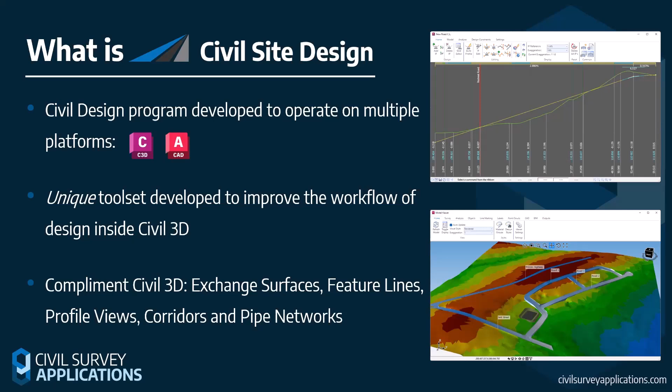However, we're not intended to be a replacement. As I said, we're intended to be like a companion. So the idea is that with all of your design and all of the extra tools and functions that we offer that Civil 3D doesn't, you're then able to generate Civil 3D profiles, profile views. You're able to generate a corridor, a Civil 3D corridor from your string design, which in turn will also create the assemblies and sub-assemblies for you, including pipe networks.

So you can use Civil Site Design for your pipe network design, your analysis, and then output profile views of your pipe networks, and also your structures and pipes and structures in the drawing. So this is just a very broad brush kind of picture of the type of things that we can do with the software, but this is how it integrates with Civil 3D.

Some of these things you'll see, but due to the time frame we've got, this is very much a greatest hits or taster session of some of what we can do to improve your Civil 3D workflow. Now, when it comes to key features, I've got quite a few here to go through, some quick, some not so quick, because they require a little bit more attention.

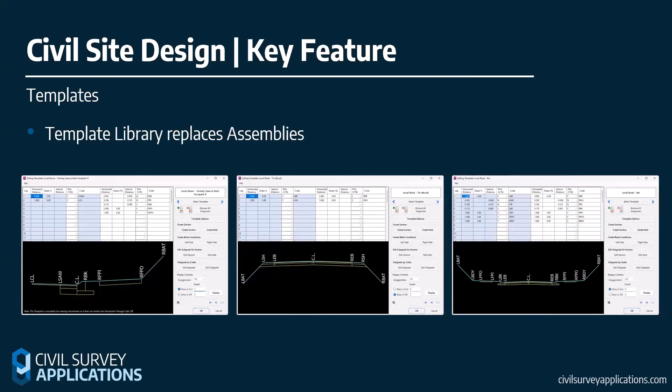And by the way, if you are a Civil Site Design user, you are going to be getting a sneak preview of 25.1, which is due out probably in the next week or two. And some of the new features which have gone into that, including a brand new sectional volumes tool, you'll actually get to see, which is kind of a bonus.

Artificial intelligence is also part of Civil Site Design. You're actually going to see me use this first one - this is called Project Assist. This was a module that was developed a couple of years ago, just to sort of dip our toe into the use of AI with civil design software. You'll get to see this in action, so I'm not going to spend too much time talking about it here because it's pretty meaningless without a demonstration.

But also developed on V25, we've now got the option to use custom ChatGPTs to develop what we call scripts for advanced cross-section editing. For those of you that know what Civil Site Design is, we have something called design variations, and in V25 we added what we call custom variations. So customers can develop their own variations, and you can actually use a custom ChatGPT to help you develop them. So AI is now becoming a significant part, and my understanding is it will also become a significant part of the software.

Now, one of the big components of our software is the vertical grading editor. We undertook a user feedback survey a couple of years ago now, and one of the main responses we got back as to what was the top feature was this feature, the vertical grading editor. So our customers tell us that this feature is one of the key features. The good thing about this is that we can basically apply speed table assessments - Austroads speed tables can be applied in the background with this.

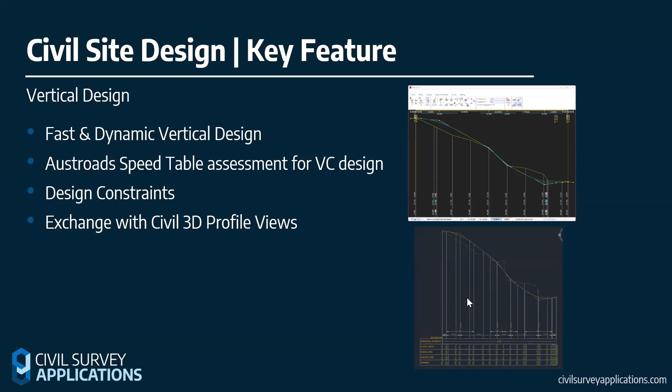Whole ton of editing tools for IP-based vertical design. We have something called design constraints - again, I'm going to show you this sort of in action, but critically we can send these profiles out, or these vertical designs for our strings, out as Civil 3D profiles. And crucially, we can edit those Civil 3D profiles and pass it back to Civil Site Design or vice versa. So a crucial part of this is that we're not just restricting the design to us - you can create Civil 3D profiles with it.

We also have advanced cross-section editing. So this goes on to something I mentioned earlier about the design variations. We can do a lot of advanced cross-section editing, which takes you outside of the box of simply applying a template and having to apply, even with Civil 3D, different sub-assembly pieces. With the version that came out in Version 25 in May this year, we're able to now start to put on bits of conditional design or even form a layback just with the standard core set of tools now. And I'll show you the layback option a little bit later on.

Model Viewer. So you can see this is a whistle-stop tour of all the different things the software can do. There is a lot, and I'm scraping the surface even with Model Viewer, the capacity of what we can do in here. Predominantly, I would say this is the design aid first to help you with your design, as we're going to be seeing very shortly. But also, it's got surface visualization. We can show analysis. All those things that I've put on that list and more are available as part of Model Viewer.

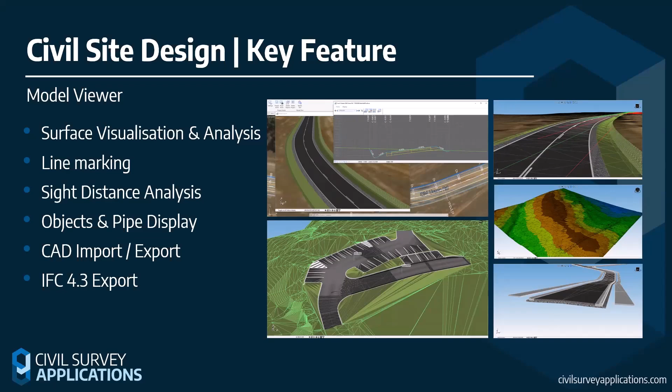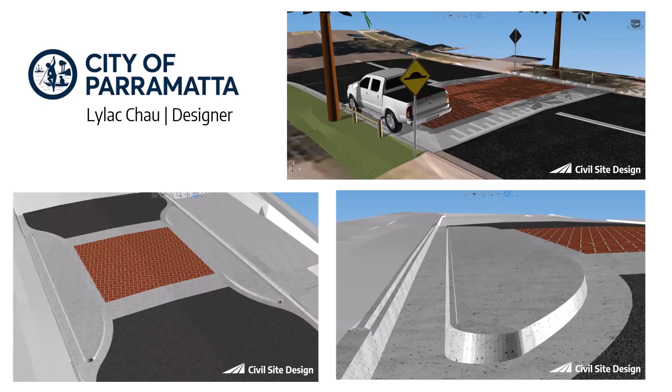It's just a couple of examples of customer Model Viewer projects. Okay, so this is using Model Viewer out of the box. This is not using any particularly special rendering program or anything like that. This is just using native Civil Site Design. A couple of projects where the customer has used it for either reconstruction, or they've used it for, in this case, lot design. So Model Viewer, very, very important.

In the theme of visualization, we've also got Subgrade Modelling. Really, really good piece of kit, this, because this is essentially going to give you a surface of the underside of your design, essentially giving you a surface through any materials you have specified on your strings and generating that for you for the purposes of, say, bulk earthworks. And obviously, crucially, with any of what we're doing here, we can pass this over to Civil 3D.

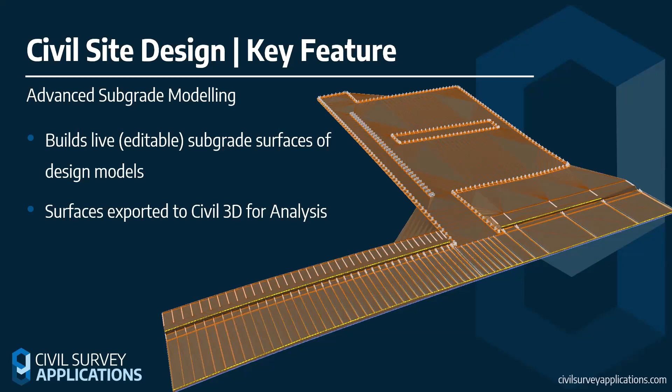I thought it was going to be the slide next. It isn't. One last thing, the pipes. I had a conversation with a prospect last week who was talking about how they're interested in looking at the pipes module for Civil Site Design to work on top of Civil 3D. And yes, you can use our pipes module straight on top of Civil 3D surfaces, but crucially, you can also use it with our string design, which means as you make changes to your strings, i.e. your roads, footpaths, whatever it happens to be, the software will respond to those design changes.

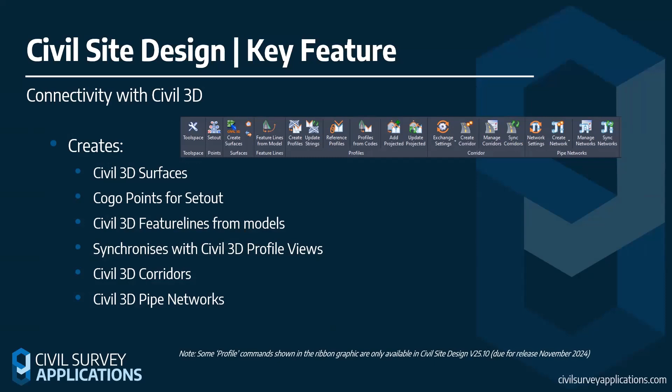So we're not excluding Civil 3D. We're not drawing a line in the sand and saying, hey, this is it. Okay, you use us, you can. But as far as we're concerned, we want to have that full round trip. So let's head into the software. I'm going to kill my video now.

And there we go. Right.

So we're going to start off just very quickly by reviewing what's in Civil 3D. Civil Site Design includes a number of different ribbon tabs. You can see them at the top here. Now, by and large, I won't be using many of them because most of what I can do now is through this environment here, which is the Toolspace.

You can see here that we have a Civil 3D surface already created. So we pretty much just say to you, if you've got a Civil 3D surface, maybe it's a point cloud surface, it's come from ReCap, you've brought it into Civil 3D, you want to start designing on top of that, we will basically read that surface for you.

We also get to build Civil 3D alignments. The alignment module for Civil 3D is excellent. The geometry editing, annotation, labeling is actually very, very good. So we anchor onto the top of those. To save time in this presentation, I've already got those created. We don't want to be sitting here creating alignments for the duration. It also helps me with something I'm going to be running very shortly.

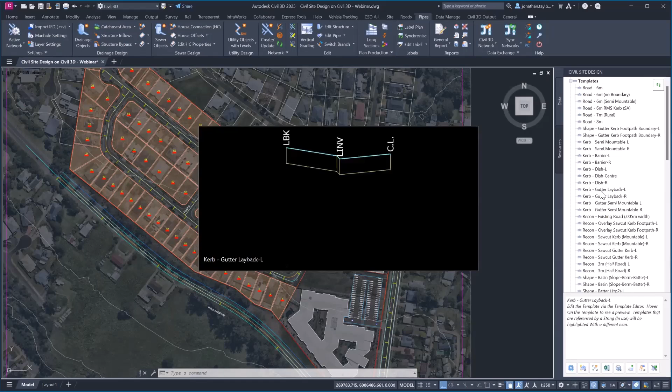I just want to make mention of templates, because this is a bit chicken and egg. I'm going to be showing a function in a minute called Project Assist, where I have to pick templates, and it'd be worth you seeing them beforehand, so it builds a bit of context. You can already see that as I'm hovering over the Toolspace here, this is giving me a preview of any templates that we have available in this project.

I'm just going to very quickly open up the template editor here. This is the template editor where we can create templates from scratch, manage templates, or copy versions for other parts of our project. Every template is made up of what we call a code, and these codes are important because we can use them later on for the purposes of subgrade and cross-section editing. So I can tell this code later on to match to a surface, follow a polyline, or match to an alignment.

If I right-click, I'm given some options. I can go in and apply different materials. This is really crucial because ultimately this can give me a subgrade surface later on through our Subgrade Model Manager. And as you'll see very shortly, the new section volumes form that we've got will also be able to provide us with these values sectionally as we're going through our design.

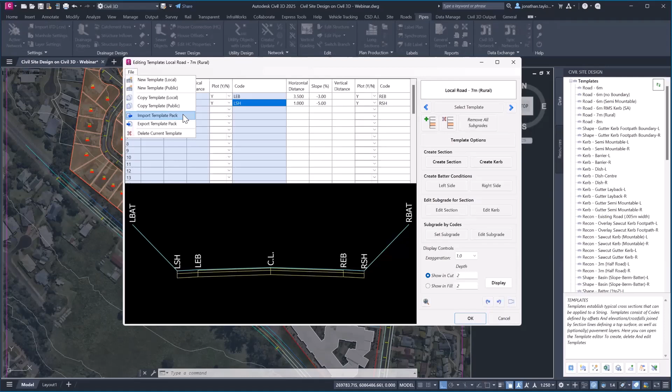So these templates can be applied anywhere in the job. They can be edited at any point. I can also share these templates. We've got a really neat little system here called packing where I can zip all the templates in the job, pass them to somebody else, and they can import them. For time, I'm not going into this. I've got a very limited amount of time, so I won't be able to show you template creation.

But what I'm going to do now is apply those templates as what we call strings in Civil Site Design over the top of part of this design. For those of you that haven't heard the term string before, a string is essentially a corridor with the profile and the section views all bundled into the one object, and it's incredibly quick and nimble to work with.

So if you see over here where I've got strings, we're only really going to be relating to a few of those, but essentially these are our replacement for things like the corridor. Now, we're going to be running this button down here, Project Assist. Project Assist is an AI-driven, put it this way, it'll help you build your project.

What has just happened, the software has just read all of the alignments that I've created in the project. And this is another good reason why I've already created them. And based on their geometry and the naming that I have used, it will learn from me not necessarily what type of string, but what type of control to put on top of that alignment. So you can see here road 1, it's seen the fact that I've called it road 1. It is assumed that that is going to be a road string.

Quite right. Now, if some of these aren't quite right, I teach the AI by changing it and tell it, well, actually, that's not going to become a road. That's going to be, I don't know, footpath control, for whatever strange reason I might do that. But importantly, it's learning from me. So every time I start a job or work within a job, it's going to try and present to me the best option. I'm going to click on confirm.

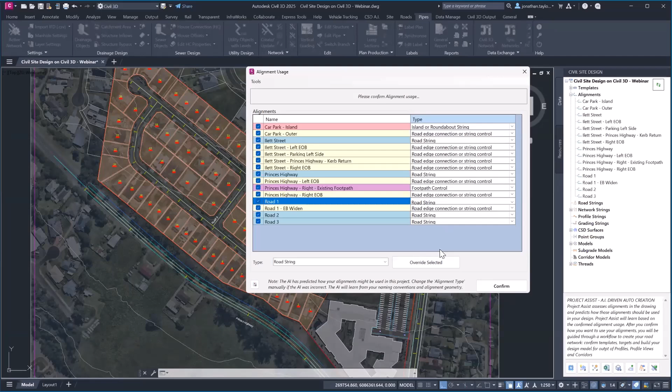Now, everything I'm doing here can be undertaken manually by you as the user. And many users of Civil Site Design would do what this is just about to do in a matter of, say, 30 seconds. They would do it piece by piece, which is perfectly acceptable. And most users, we would expect to do that initially to understand how this is working.

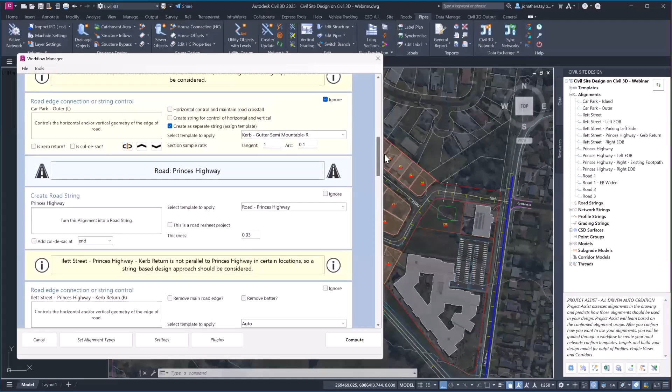This workflow form, which I'm not going to sit here and go through every single item, is essentially saying, look, there's a Civil 3D alignment here. We've set it to road. What template would you like from your list to apply? And it will go ahead and build that string for me. We've got another one here that looks like it's called a kerb return. Oh, that looks like it should be a kerb return.

Now, to save a bit of time here, what I've done is I've already filled this in using a workflow. Now, this workflow, if I go open workflow, essentially it's a saved copy of this form. Okay, so I'm going to just come in here and go open. I would have spent maybe 2 minutes putting this together. So as far as time goes, there's 2 minutes less on the webinar. So I've already filled it in.

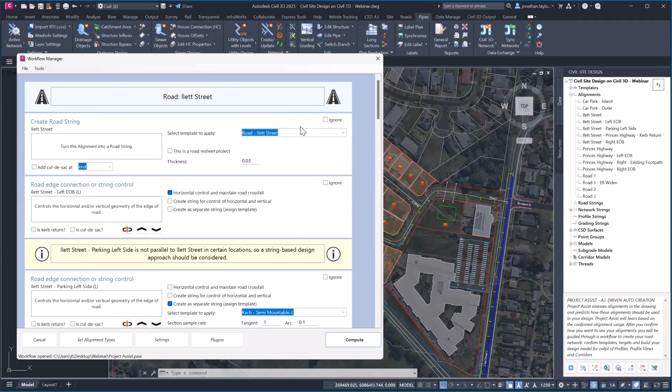So I can go through this form, check how the alignments are all being assigned. And at the very bottom here, I decide, well, look, if there's any kerb returns that need to be applied between intersecting roads, make those 8.5. This is our new intersection manager, by the way. I am going to highlight it. It's in version 25.10, just about to be released.

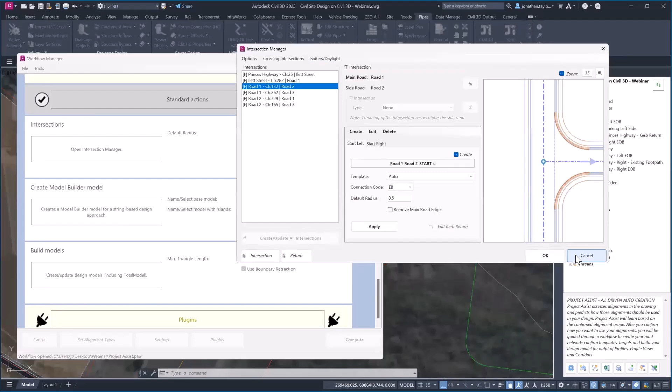When you create an intersection now with Civil Site Design, before you even build the kerb returns, you can actually begin to analyze and see how that intersection will be formed. You can do all sorts of things with regards to removing parts of the through codes, etc. A lot of good things. I haven't got time, unfortunately, to show you what this does, but essentially this is something that we'll be adding into v25.10. I'm going to click on compute.

And what's going to happen is the software is going to go ahead, look at all the templates that I've assigned and apply them through the medium of a string onto, as you can see what it's doing there, onto the road. Now, great thing is, in a minute, you'll actually see the kerb returns with an 8.5 meter radius also being applied.

Now, this isn't meant to be sort of a smoke and mirrors exercise. I'm not doing any kind of under the hood work here. Everything you can see here I would have done using the tool set that Civil Site Design has, I'm now just fast tracking the process. Ultimately, what we're saying here is, hey, let Civil Site Design build the framework of your job. I'm going to close that down. Let it build these elements for you so you can then focus on designing them.

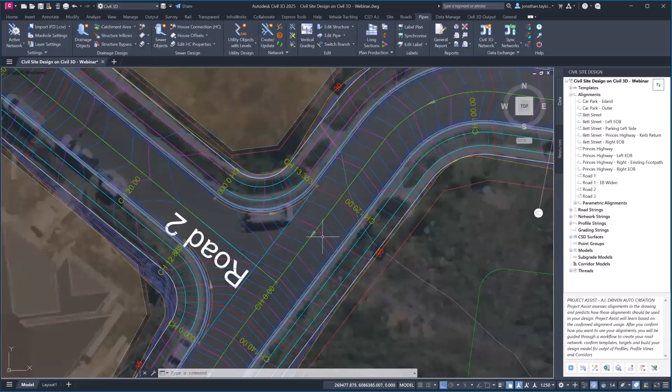Okay, I haven't got to sit here, particularly with Civil 3D. Kerb returns were one of the things that turned me off and turned me back on to Civil Site Design at the time. Just having those kerb returns built in a way where I can start to review the vertical design and edit them was absolute gold at the particular time.

Now, I'm just going to do something very quickly. I'm going to head to Model Viewer. I should have done this probably at the start, but the Model Viewer, which I highlighted in one of the slides with the key features, is giving me a visualization and at the same time giving me real-time design of my project.

So I'm looking at my Civil 3D surface here. If I go back to Toggle Display, I'm going to go to Contours and just turn some things on. As far as Model Viewer goes, at its most basic level, all I need to do in this environment is turn things on and off. I'm going to turn on some strings, some contours, and the model that the software has built for me, which I can edit.

Let's go and turn this on now. So again, no vertical design, no cross-section editing. It's simply applied the templates to my design with the controls that I nominated and applied that in the project. So this is now what I'm seeing. Really good environment, really easy to access. I can screenshot some of this if I want to.

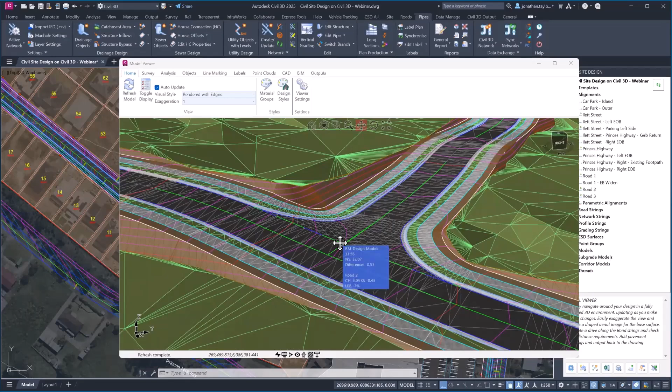There are some excellent output tools where we can output videos, AVI files, etc. Even output this as an OBJ file for other programs if you want to do some enhanced rendering and animation, Twinmotion and so forth. So Model Viewer straight away gives me some context.

One thing I'm actually going to do, and I hadn't written this in my notes, is change the grass that we're using in the background and just drape this aerial image. This is a high-res image. I can apply and click OK. So once that's applied that imagery, you can see here, a really good way of being able to quickly see your design.

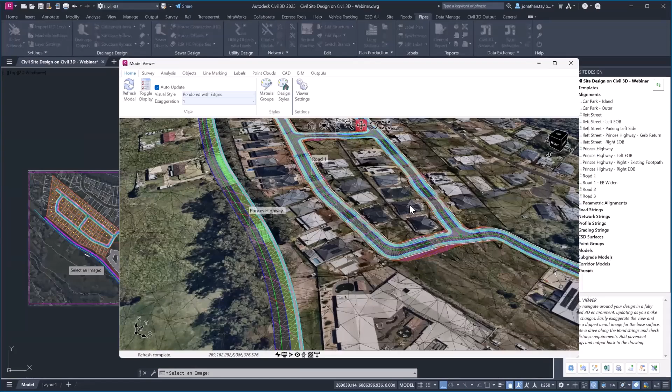I'm actually going to turn the aerial image off in this particular instance, just because we don't really need to see it right now. Okay, so the software's gone ahead and built content for us. All of that content is now listed in this Toolspace. You can see here, these Civil 3D alignments now have green ticks. These tell me that they've been used by Civil Site Design.

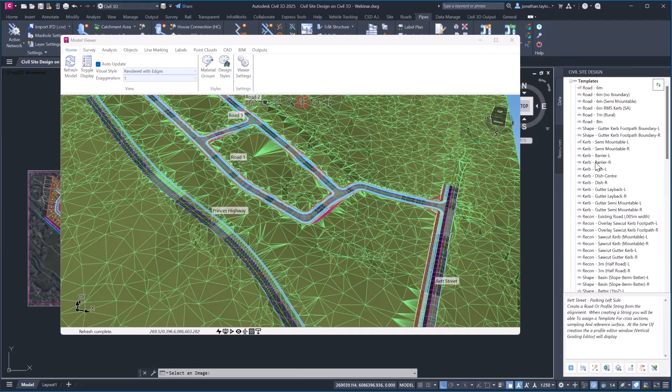If I head to the templates, you can also see that template being applied. I know it's got a green tick. There are others as I scroll further down. Here we go. So these templates, again, I already created. They happen to be in my standard library. They are also being applied in this project.

Now, when it comes to editing these strings, I'm going to show you the vertical design. I'm just going to minimize the Toolspace to show you how quickly you can do this. If you're an existing Civil Site Design user and you haven't used Toolspace, this honestly is a game changer. I know everyone's got a habitual route of going VG. Try this instead. Let's open road 2, because I think road 2 is pretty horrendous in respect to its vertical design.

Vertical grading editor, straight in. Road 2, right click. I can access a multitude of different tools in here, including plotting, which is something we'll do later. The vertical grading editor, if you haven't seen it before, is essentially a live profile editor with a lot of really good tools you can use to change a vertical design. It's an IP-based design, first of all.

We've got a little button down here to toggle on fast mode. Normally, as I'm making edits, the software updates everything for me as I make design changes. I'm going to turn that off, so the updates will happen when I close. I'm going to use some of these tools to delete IPs. As you can see, I'm very quickly able to go in and delete. I've also got a grid view of this design.

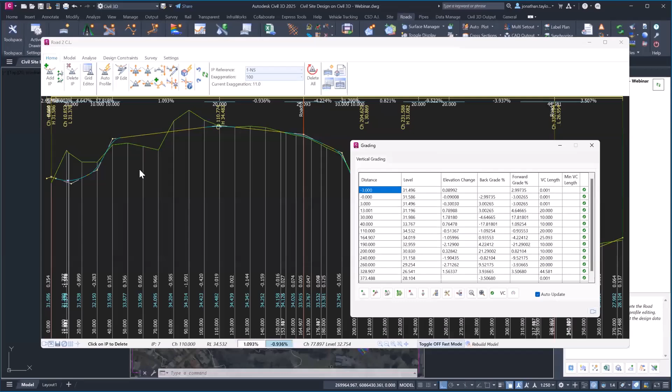And by the way, when I say design, all the software has done here is, when I built the string, it puts a profile of best fit over the surface, which I chose to reference in the background for the batters. So don't think there's generative design happening here. There isn't yet. At the moment it's simply a best fit, which you can choose to get rid of entirely. We have a delete all button that will get rid of it.

Or I can just choose to work with this and manage it as best I can. So we've got the option to add IPs, use the grid editor, edit IPs outside of the grid editor. We've actually got a really lovely contextual editor, which is when I click near an IP, I can do things like match the surface or delete.

One of the most beneficial tools in here, which got added probably about 4 or 5 years ago, it seems like 5 minutes ago, but it wasn't, is edit by range. So if you've got 3 kilometers of road, or even 500 meters of road, you can come in here and say, between say chainage 100 and chainage 260, down here to down here, I'd like to delete all the IPs. And we're going to delete. And yes.

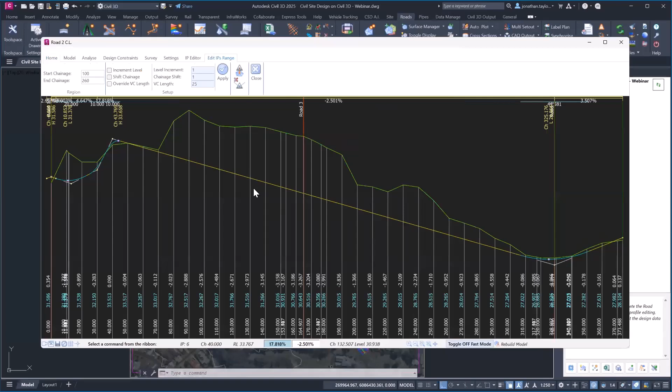Really good tool. Now, one thing you may notice here is that the software is actually flagging to us where it's intersecting other roads. I'm just going to pop in a vertical curve here, because let's face it, a lot of cut here would be abysmal. That's a rather large vertical curve there, but anyway, that will work.

You'll notice that we've got road 3 sitting there. And the way this works is if I just turn fast mode on and rebuild, this is completely dynamic. This was game changing for me when I was using, at the time, just Civil 3D. If you have multiple roads connected to each other, they all interact.

So if I open up the vertical grading for road 3 here, road 3, as you would want it to, connects onto road 2, which is this spot here. So this is the center line of road 2 where we were a second ago. Watch what happens as I move the design. It's quick. It's so quick you probably didn't even see it happen.

I'm going to just put this into fill. There we go. These two are linked and connected, which means I can then form intersections and kerb returns. Now, I'm just going to delete some of these IPs to clean it up a fraction more. There we go.

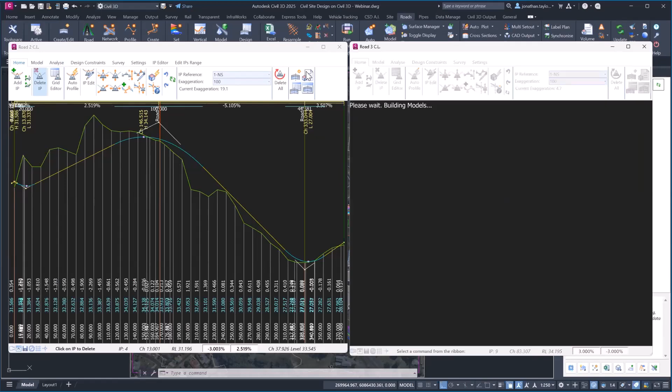One of the things about the vertical design is, yes, there's a whole range of tools we can talk about in respect of design, but crucially, I can create Civil 3D profiles immediately.

I could have created them as soon as I'd created my strings. I could have gone ahead and built Civil 3D profiles. The reason for this, I'll show you. So if we go road strings, create, update, Civil 3D profiles...

What we do is we get you to choose your Civil 3D profile view styles, the label sets, etc. We then assign those to profile views of whatever string you want to present in the drawing. So I'm just going to go here and grab road 1, 2, and 3. In fact, I'll grab Ilett Street as well. It's going to be using the predefined settings that I've assigned at the top here.

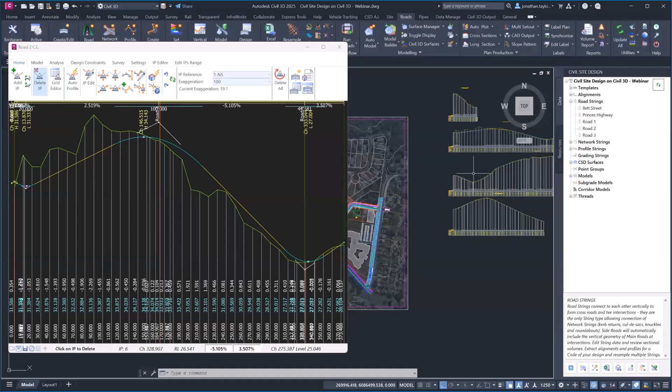I'm going to click on this little picker tool to set a location for where I want these and create update views. So that's using my default styles. You may have yours. The software will do the same thing.

The great thing with these is, yes, you can do whatever you want. If you decide you're looking to plot these off, you can, but they're entirely dynamic, which means if I continue to make changes to the design, such as - where are we here? We are on road 2, yep. Obviously the scaling looks slightly different.

But if I decide that I do want to make a design change here and move this down considerably, once I've done that, I can then go and basically pass this back to Civil 3D. I'm just waiting for the model to update. Oh, sorry, it's already done it. Create, update, Civil 3D profiles.

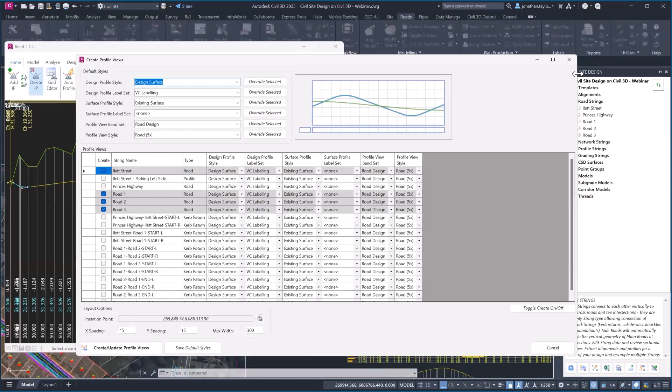Once the form pops up, I don't actually have to do anything unless I've created new profiles. I'll click Create, Update, Profile Views. And we should see this one. There we go, update. Now, the great thing is I can actually do the opposite. So if you are inclined to use the Civil 3D vertical design tools, you can edit the Civil 3D vertical design yourself and then pass that using this tool back to Civil Site Design. Update from Civil 3D, and what we should find is that this should then update, which it has done.

Okay, so there is already the first connection with Civil 3D, showing you how those two things can connect together. One of the crucial things with Civil Site Design, as I've highlighted, is the fact that you can connect roads together and they will talk to each other, allowing you to form a connection, an intersection, and then kerb returns.

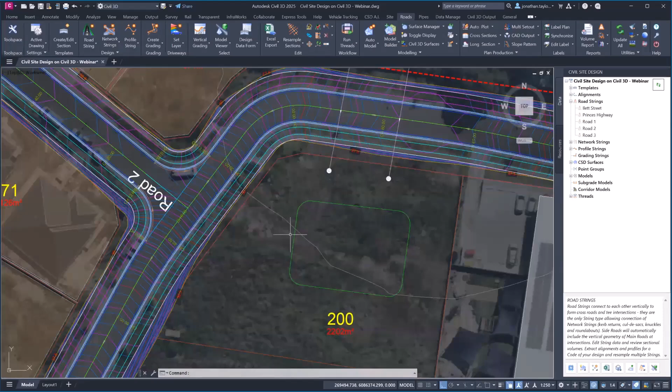And again, just putting kerb returns - this could be between an existing road, this could be between a rural road to a driveway, it could be any number of different combinations. But crucially for me, I'm just going to show you here because it's a little bit cleaner, I could show you in any number of different scenarios.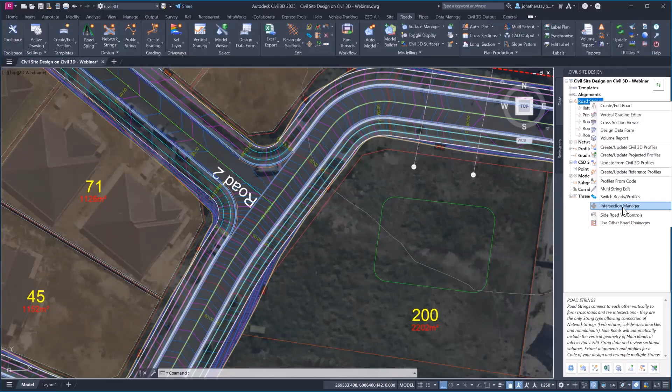I'm going to just highlight a tool here called the Intersection Manager, which is found here, and is only found on the 25.1 release. It does offer some extra tools, but crucially, all the existing tools to manage this intersection are also still available to users. But if I click on the intersection tool here and pick...

This is giving me information about this intersection. Now, what I'm going to do, because I know this is going to happen, is turn off this aerial image - I'm sure we all know what happens when you fight draw order on an aerial image, it just constantly gets in the way. So I've turned the aerial image off just for ease.

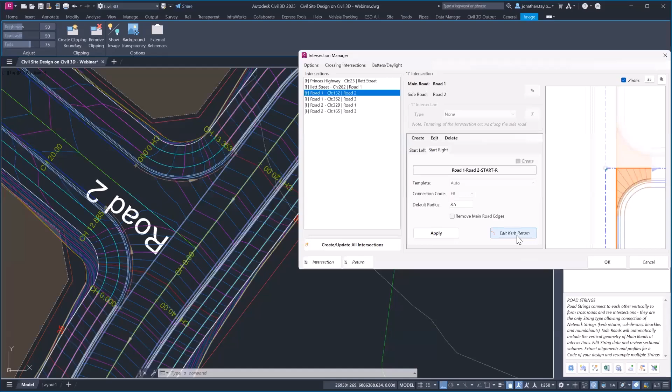The curb return in here is highlighted, so I can go in and start to say, well, actually, do you know what, I'd like to change this right-hand side radius to something else. The tool that users generally use is this one here, called Edit Kerb Return. So there's nothing new, but I can come in here and change the value.

I can also use different compound arrangements if I want something a bit more detailed. However, I'm just going to change this to 7.5, click on Apply, and the software will go ahead and now change that radius. It's also rebuilding the model in the background, which is why I might just need to do a bit of a refresh on the line work. There we go, just a quick regen.

Also, one of the great things we've added in here is the ability to create what we call a saddle. You might have different terminology for this, but at the moment, the edge of bitumen of the design is being pushed all the way through the intersection.

If you want to remove this, we go Edit, remove main road edge. What we should see now is the software is going to go ahead, remove the edge and then update the two models for me, which is now done. I'll just need to do a quick regen there to refresh the line work.

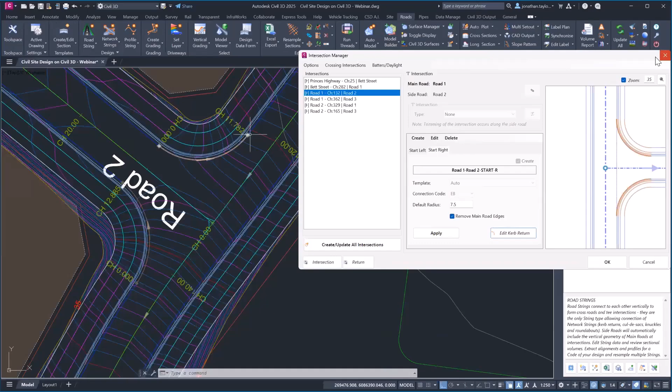There we go. So this is something that you couldn't - well, you could do, but it was very, very tricky with variations in any current commercial release of Civil Site Design, whereas that's now much cleaner and easier for our user base. Now, that's the curb returns, very briefly.

And the intersection - there's just one other network string, dynamic string I want to show you, which is the cul-de-sac. I'm sure for many of you, if you've used Civil 3D, you've watched videos on how to do the cul-de-sac, whereas I'll be honest with you, this is an absolute piece of cake. And certainly with respect to design, the vertical design, it's much more logical. So I'm just going to very quickly show you how we build a cul-de-sac with Civil Site Design.

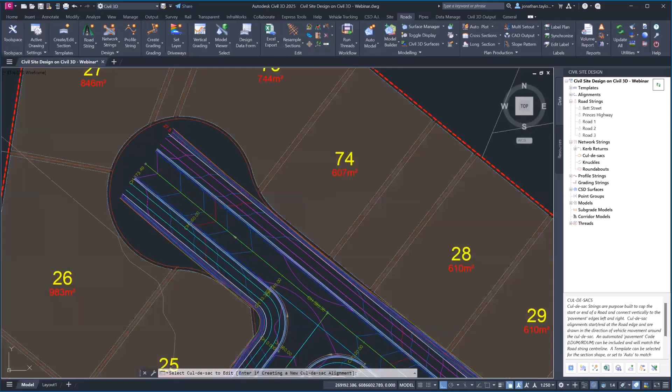And all we require is the fact that you would have a road - in my case, this is this road here - up to the point where the cul-de-sac would terminate. So I'm going to create this cul-de-sac, call it CDS, not CSD, Civil Site Design - CDS for cul-de-sac. I'm going to pick my road here. You can see what I mean, by the way, this is a whistle-stop tour.

I'm not hanging around here, just showing you some of the things we can do. The idea is that we're building these things up quickly so I can spend more time focusing on the design rather than how do I build a cul-de-sac and get it in the drawing so I can then work with it.

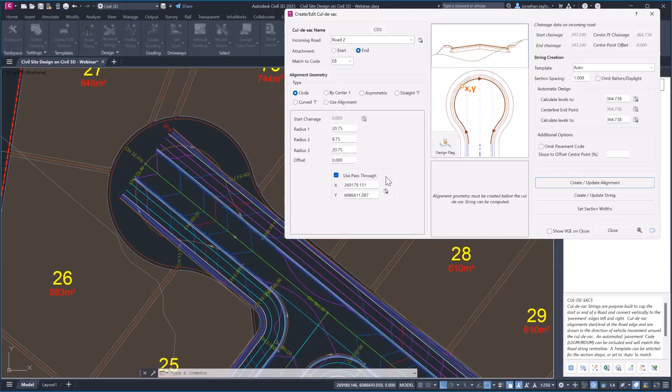Now, the numbers I've got in here are 20.75, 8.75. I know these off by heart because that's just what they are. We build the Civil 3D alignment. I can now edit the Civil 3D alignment, so I decide, well, actually, that radius needs to be 7. Create, update the alignment - you can see how that's made that a lot smaller.

These graphics over here really help people understand what the numbers represent in this particular form, and these graphics appear all over the place in our software. Just a quick side note - this button here, if you ever see it, sends you to a playlist on our YouTube channel all about this particular feature or function. I'm going to click on Create Update String.

So the alignment's in play. I now want the software to go ahead and build using that particular alignment geometry, which it's now going to do, as you can see there. Still going to just do a quick regen here, just to make sure the graphics are updating. And I'm going to close. So it is done - it's literally RE for regen here to update.

So we'll just have a quick look at Model Viewer. I haven't done anything with Model Viewer other than literally open it up. The software is designed to just display what you've told it to display.

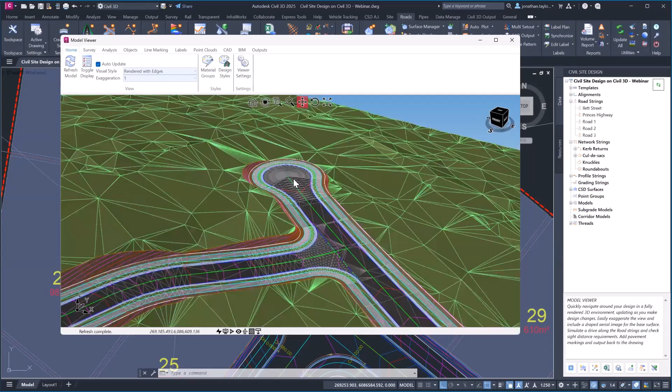Now, if I right click on here, I've got all sorts of functions. The water drop is gold. I should actually show you the water drop in civil site design in the plan, but the water drop's really good. Close this down - let me just show you this.

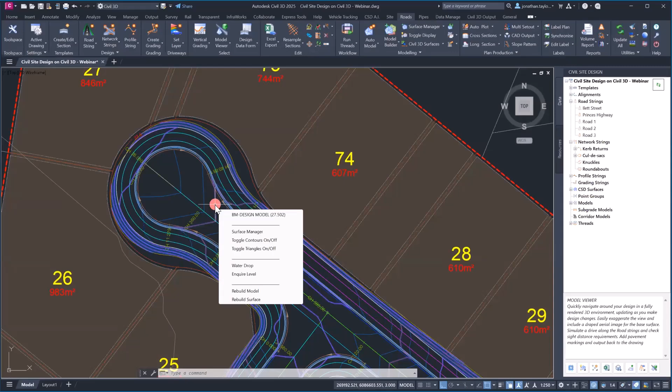This is not something I plan to do, but when I click on part of this, the contour here, go water drop, we actually give you a live jig. So this is live - I don't have to click. If I do click, it will lock it in place and I can actually update them to my design. But this is a great way of just being able to see where your runoff will end up.

All right, a couple of things then before we look at pipes. The next one is going to be cross-section editing. It's all very well applying a template in here, but crucially, how do I make changes to that template? I'm actually going to be putting in a layback just in here to show you how this works. When we right-click on Bett Street, we've got an option called the cross-section viewer.

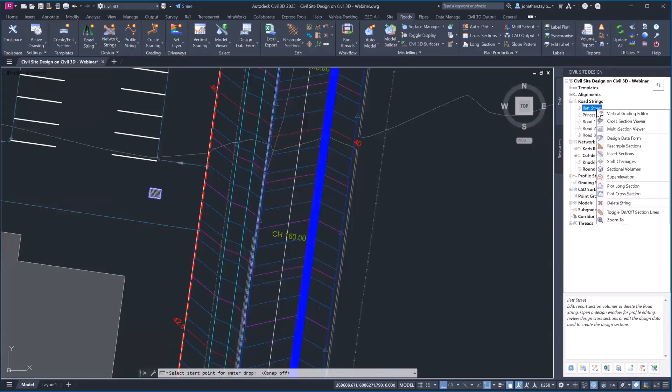I'm going to open up the cross-section viewer. This is a live cross-section, and in conjunction with the vertical design, I'm able to get a live cross-section. In fact, I can open up multiple live cross-sections showing this part of the project. So I'm just going to move - can you see I'm just making changes to the vertical design and the center line's updating?

That alone is incredibly helpful. So I'm not going to build a corridor to create section views to now see what's going on in cross-section world, because I can open up multiple cross-sections just by holding shift. I can open up and see as many as I want whilst I'm in the middle of my design.

Now, the benefit of this is that I can then start to apply what we call design variations. So what's already happened here is when we built this road, Project Assist actually did some work for us - it told it that the alignment on the left and the alignment on the right need to be used for the horizontal control of the edge of my design. If we head to this form here, called the design data form, those variations were applied on our behalf - take the left edge of bitumen.

That's why the code is so important in the template. Take the code, match it onto the alignment called Ilett Street left edge of bitumen, and simply force it using the slope that it's on there at the moment. I'm going to show you just one variation which we added in V25, which is the ability to force a layback shape in here.

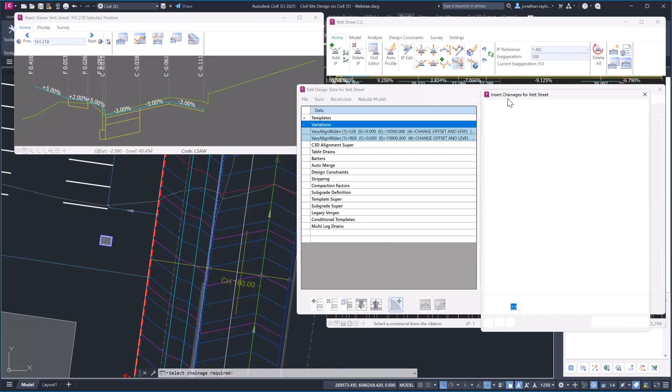Layback crossing, add variation. I'm actually going to go ahead and add here a point where I want the software to start my layback, which is going to be roughly here. And I'm going to copy this number and click OK. So it's crucial I have what we call a sample or a section at the start point of my driveway layback.

I'm going to pop in an end chainage of 1,000. The software is going to calculate the layback for me in a second. I'm going to put in a layback width of 0.6, and I'm going to be putting in a 900 width for the taper. The crossing, I'm going to make 7.6, and the end taper will be 0.9.

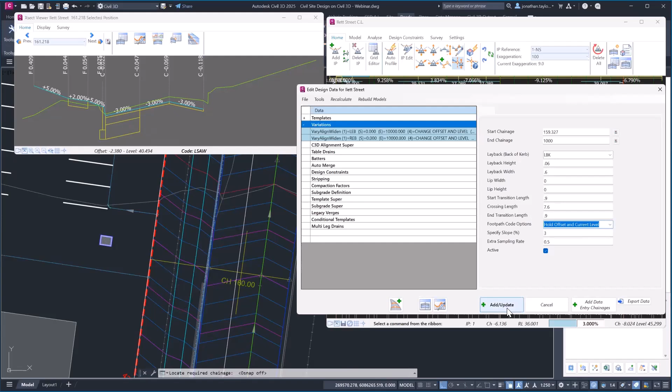The footpath, traditionally when people have used our variations in the past, they had to do a bit of work to stop this footpath from moving, whereas we've actually got some controls for that. So I'm actually going to say keep the footpath where it is and keep it at its current level. I'm going to click Add Update. Before I do, in fact, I'll do that first and then recalculate.

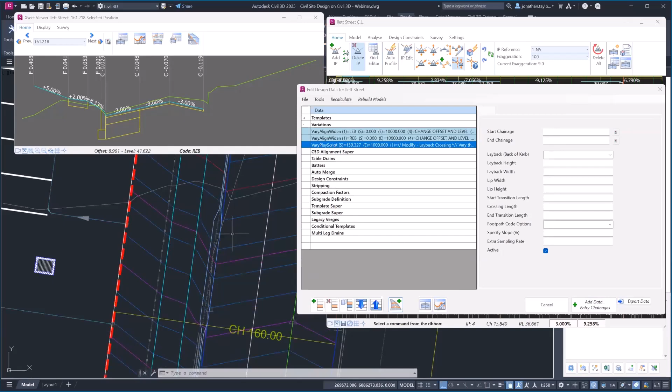So you may have seen in the background there in the drawing, if I just hit Auto Model down here, the software has actually gone in and now applied. Just got some ghosting. Oh no, it's all good. Might just have to do another regen. There we go. It's now gone and applied the layback, but crucially kept the footpath where it is.

Just to show you how this looks, what I'm going to do is reopen the cross-section window, click the picker tool, click in here. And this is now showing you, yes, we've got quite a steep slope there to my footpath.

Maybe I decide, well, actually, I want to put 30mm lip on the, just on this particular location. Add Update, recalculate. You can actually already see that recalculate button is very important. It means that it basically goes ahead and resamples, essentially resamples with our extra sampling. It's now popped in that layback.

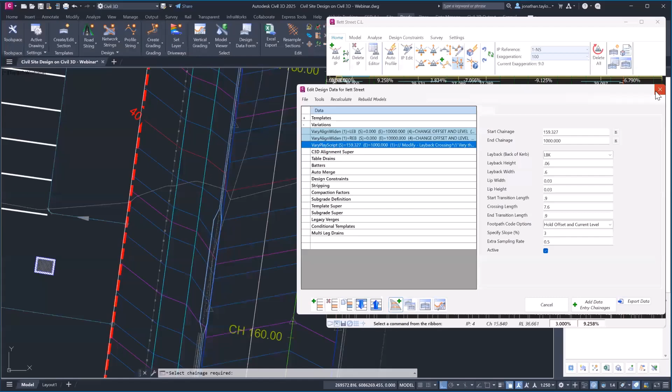So very, very useful single variation that used to take about 6 variations, in fact 9, if you wanted to do the footpath to manage. And now we can build these. And I've already had one user, for example, come to me and say, we'd like to do something different with the benching. Please, can we adapt it? And we're able to adapt it for that user's particular requirements.

So look, we've been building and sort of having a bit of a play with the vertical design, with the cross section, with the strings, how everything's connected together. One thing we'll just very quickly do is look at the subgrade model. So the subgrade model, we could have again presented within a few seconds of having put this road string and this design together, or these road strings, network strings together, including, by the way, if we designed this car park, which we can also do with civil site design, just using separate strings.

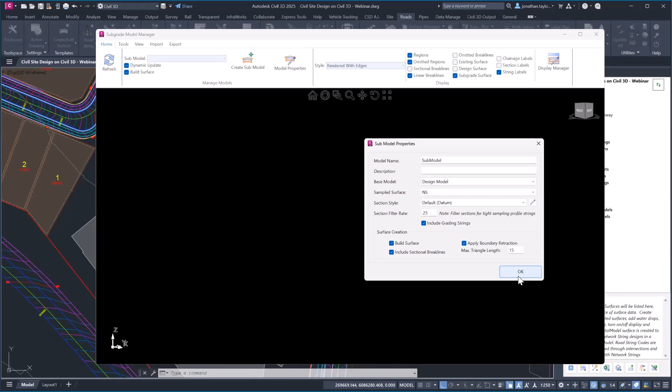We're able to build a really, really good subgrade model. I'm going to show you how very easy this is to use, and mention a really good resource that we've got. This works a bit like Model Viewer, except you're able to go in and cherry pick the bits that you do and do not want to see. I'm going to go create submodel. I'm going to leave everything as it is out of the box. In fact, I'm going to go and pick my design model here, which includes absolutely everything, and simply click OK. So this is what you're going to get out of the box, I'd say 90% of the time with the Subgrade Model Manager. We'll just let that load up.

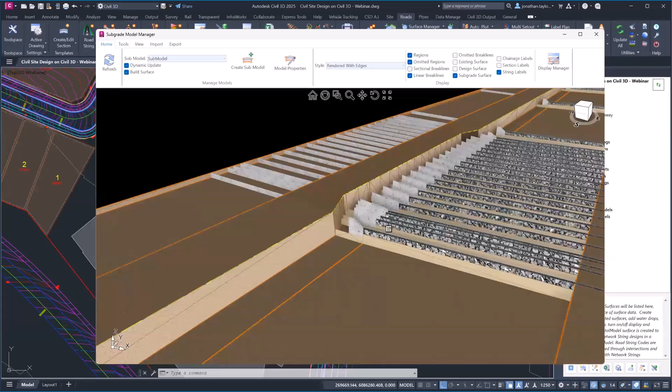There's a bit of processing to do here, but also I'm trying to present via Zoom. So let's have a quick look. There's my layback. Okay, there's the footpath behind. This is a really good environment to work in, because if there's any part of this I don't want to see or don't want to be included, I can simply click on it and omit.

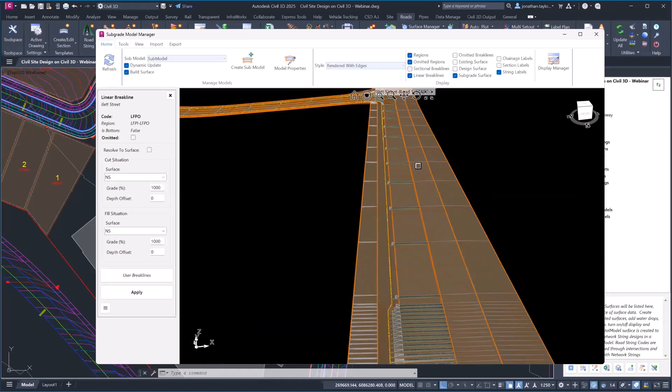I actually got through this a little bit quicker than I thought. I was trying to make sure I didn't run out of time, but I'm probably bang on time, I think, at the moment.

Let's just wait for the Subgrade Model Manager to pop down. I guess the last thing to mention is amongst all the things I haven't been able to show you today, and there are a lot, the next big segment of the software is the pipes. Currently I'm just operating the pipes through the ribbon, okay? I have a couple of service pipes that I've already pre-created to give a bit of context to pipe crossings and whatnot a little bit later on.

I'm just going to use Toolspace. And this is where things get nice, as I can just turn things on and off. Maybe I want to see the triangulation of my subgrade surface. Maybe I don't. Maybe I want to turn that off. Maybe I want to turn off the contours. We'll talk about some of those export features you may have spotted a little bit later on. Let's turn the contours off for this as well.

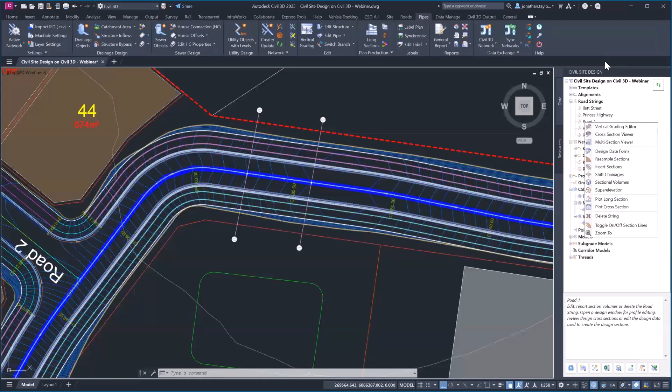So this Toolspace environment offers, pretty much at your fingertips, display editing and tool editing. Everything's contextual. Okay. There are also lots of sneaky extra features which I haven't got time to show you for V25, our next release. But crucially, though, this is where we look at the pipe. So I'm going to be turning on a layer, which I already have created, just again to save a bit of time.

This is a real job. So this job came from one of our customers. And all I've done is I've taken the polylines that they had in their project, and essentially I'm going to use these for the purposes of their drainage design to form something in the project. Now, we have an inbuilt model calculation engine. So we've got the rational method in there at the moment. We can also export what we're going to be doing in here.

Often we don't have time to do it, but we can pass that to Watercom DRAINS for analysis, and then bring it back for the purposes of, say, long section plotting. Having had the pain of having to export a DXF from DRAINS and manually edit it to get the long sections to look how I want them to look, this was an absolute godsend. So very, very briefly, I'll just mention what we have in the background here, so it builds some context to what I'm going to be doing very shortly.

We have a standard library of things like pipe tables, box section tables. We have a standard library of rainfall data, which you can bring in. You can bring in your own rainfall data from the BOM website. We have pit tables, standard pits. All of it is editable, and we would assume that most users would look to develop their own standard library or default settings for their particular projects. But out of the box, we give you something to start with.

We've also got a sewer module, which is a line and level tool to work in conjunction with house connections. And we've got services, which are essentially the base level pipe starting point, where you can just put a pipe in with a size and assign it some elevations, inverts, obverts, etc.

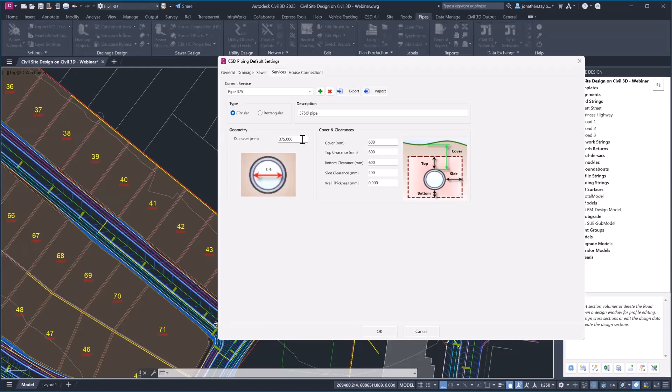So we're going to go up to drainage objects, and we're going to basically go and pick a layer. And this layer is, as I said, polylines that I've already drawn, and all I want to do is for the software to connect the vertices of these together with pits and pipes. I'm going to use all objects on selected layer. Yes. Just going to cycle through this. And the software has now gone ahead and built that for me.

So this is just a schematic layout. Okay, the fact that there's numbering in there is meaningless at the moment. Those polylines that were used originally, they're no longer used, but I've got a suite of tools to now edit. I'm actually going to shortcut this process and build a network using this button up here. Tell it where the downstream end of this system is. Call it network.

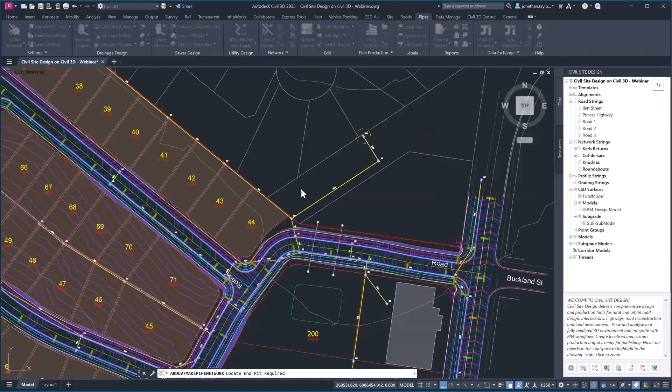We're going to go edit structure just to show you that this is a really good set of tools. So what we're trying to do here is build something for you which you can pretty much plot straight from scratch. Okay. I'm able to go in and start to use our tools. I don't use CAD to move our pits and pipes around, but I'm able to use our tools now to basically lock this design into a position where I want it to be.

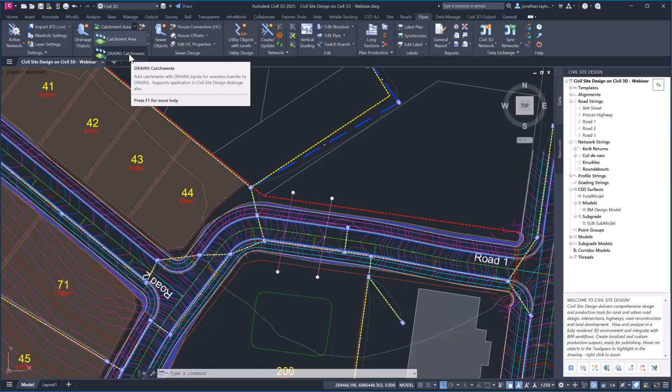If you are using Civil Site Design for your drainage design and you want to assign it flows, we have up the top here catchment areas, and we also have DRAINS catchments. The reason why we have DRAINS catchments is because those catchments, when we export this model to Watercom DRAINS, will be collected by DRAINS and used by DRAINS, okay? Whereas our standard catchment isn't.

So if I know that this design is going to be passed over to Watercom DRAINS for analysis over there, I can actually build them in here. And this is a lot quicker, I can assure you. So if I click on DRAINS catchments, we'll just click on a pit down here. In fact, we'll click on one of these over here, right in the middle of the building. You can see, for those of you that have used Watercom DRAINS, this is actually a very similar process.

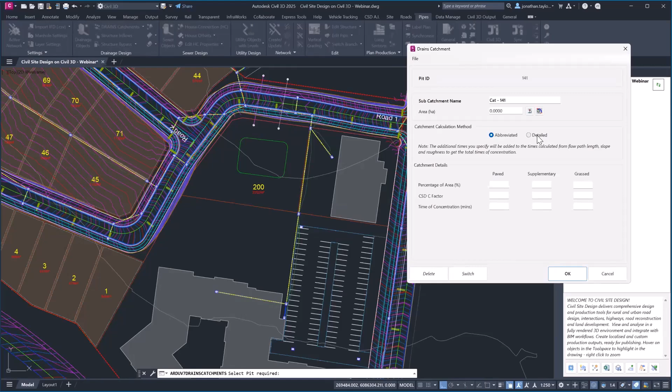I'm not going to be running the export-import process for time, but if that's something you're interested in seeing at a later date, we can obviously be showing you that. But essentially, I can apply this catchment. Our software will use that catchment, but crucially, DRAINS will also read it on your behalf and use it, which is a lot quicker than doing it just through DRAINS.

I'm just going to pop in one catchment for speed here, just one of our standard ones, and put something at the top of the system here, and then cat-1. I'm going to put a hectare in at the top, C factor of 0.6 and TC of 5. Click OK. The software is going to use this as part of its analysis. So it's already beginning to resize the pipes on my behalf. And to show you that, I'm going to open up the vertical grading editor.

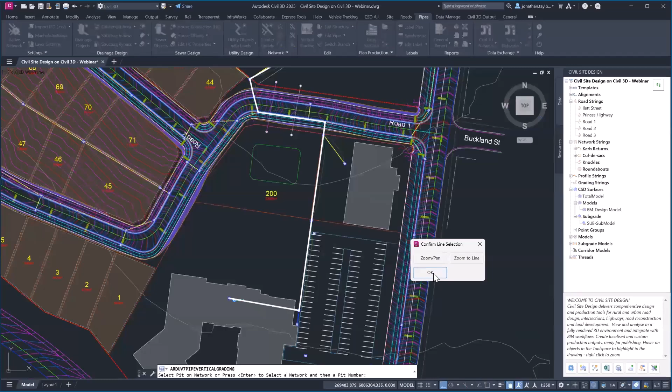This shows me the vertical design of my pipe, as you can see, all the way through to the downstream end. Before I do that, I should have just done one thing, which was told it to use the design model for the design elements of our surface, for our network, which is this one here. You'll see the difference in a second. When I open up the vertical grading editor, you'll see. Here we go. So you actually see as I'm crossing the road through here.

So what is this giving us? It's giving us the flow value from the top of the pipe down here. If I right click on the pipe, it will tell me the flow, a whole load of reportable information. It will show me that it's sized the pipe to be a 300. I can override this. So if I decide it needs to be a 375, that will now become a 375 pipe.

Right clicking further down the system, you can see I'm able to make changes to things like inverts, change the drops, change the slopes of the pipe. I can also see pipes that also happen to be crossing as part of this design, okay? And they'll flag in a different color if they are within a particular zone, i.e.

They are potential for a clash. Just going to close this down. The great thing is, as I'm designing, and by the way, you are literally getting a taster of this at the moment. As I said, the pipes module, we could show you this for a whole hour, just tinkering around, showing you bits and pieces.

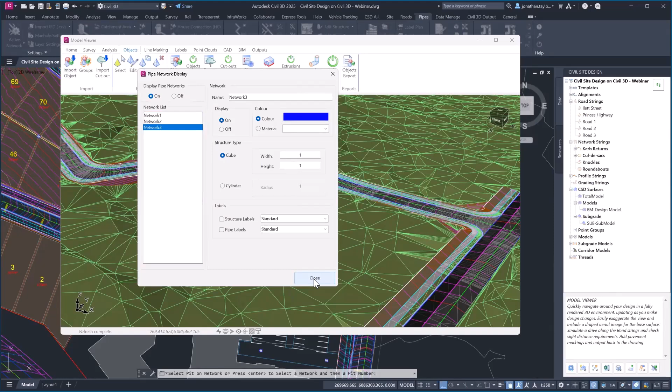If I just head to the Objects tab, Pipe Networks, I'm just going to leave this all on and just make sure that these pipe networks here, I'm going to make this red, and this one here, these are my services. I'm going to put these in 2 different colors, and we'll leave the main drainage one as blue. And ideally, you'd see transparency. So this little button down here gives me some transparency within Civil Site Design. Let's give this a second to register that I've clicked it. There we go.

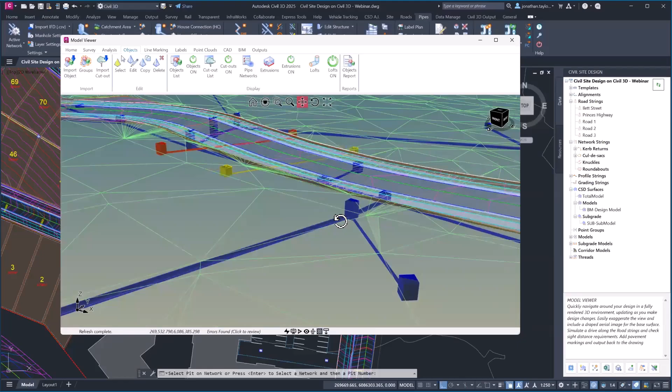And there we go. So there's no analysis going on here as such, but I'm getting a pretty good realistic 3D representation of my pipes. You can obviously see there that that small service that I put in there, wouldn't necessarily have seen that in any other environment than this one, is actually slicing through the back of my boundary code on my batter. Okay, so really nice way of just being able to visually see what's going on with your design.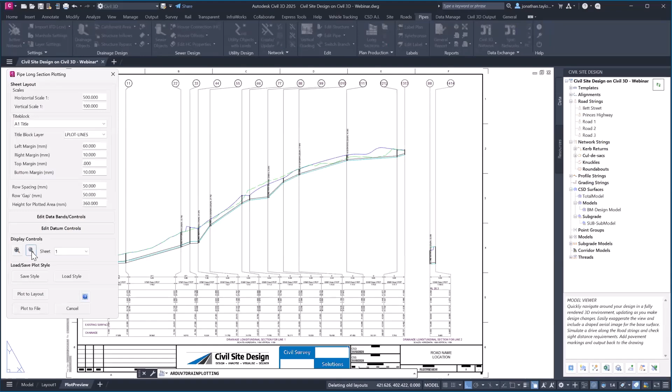Now, as far as delivering this design goes, very quickly, we've got the long sections. The long sections for this were and have always been very, very good. I'm just going to put some line numbering on here, would have been helpful. The speed at which we can develop the long sections, and this goes if you're using Watercom DRAINS, by the way. If you're using Watercom DRAINS, the idea is that when you import your design or you update your analysis in DRAINS and you provide it back to us, we will plot your HGL for you. We'll also update your pipe sizes based on what you've done in DRAINS. Here we go. So this is the default output.

Now, my plan was to talk about the deliverables at the end of this webinar. So I am just going to very quickly now talk about the deliverables from Civil Site Design in respect of things like production and plan. So I'm going to come in here. Just firstly mention, if you want to build a Civil 3D pipe network, maybe you want to pass this to InfoDrainage, we can click on Civil 3D network.

We have what's known as a conversion file, and that conversion file is a DWT file that will contain all your parts lists, okay? And crucially, for our parts lists that we use in Civil Site Design, the pipes, classes, etc., we have to know what part you would like to replace those with when we build a Civil 3D pipe network for you. So that's what this particular option is about. I'm going to pick the NS for these two and click Create Pipe Network. So it's important your DWT file is correctly set up. I'm just going to quickly pop over here and just run this.

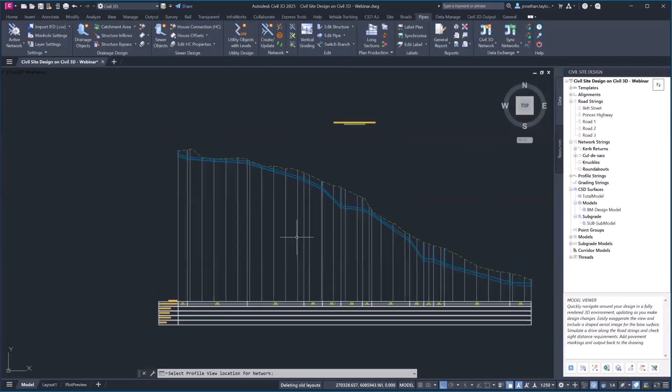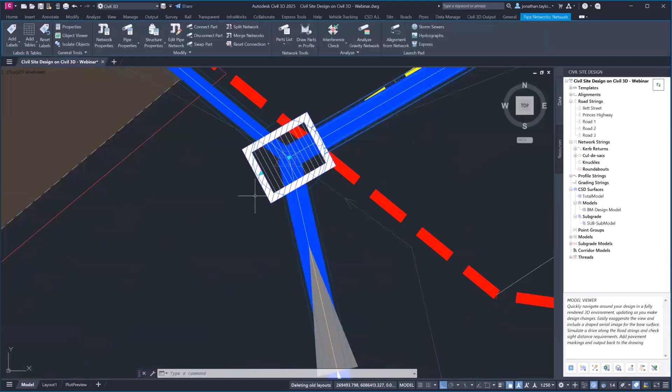So again, this is another part of being able to pass this information. I think I've used the road. Yes, I have. I've used the road profile plotting for the pipes there, but that's okay. You can get the general idea here of what's going on. I've also got a Civil 3D pipe network representing what I've just designed. I'll just use our old friend Object Viewer, which, by the way, hasn't changed. This is the same tool that was in Land Development Desktop. It's never been updated. I know that they are looking at some new things, but this is really what we're looking to develop for you, is that Civil 3D pipe network.

A couple of other things that we can also deliver. I guess it was a nice segue to talk about delivering the pipe design as a Civil 3D pipe network, but crucially, with the rest of the design and the model, Civil Site Design version 25 that was out in May has some really excellent bells and whistles in respect of surface export. We can export our design surface here to any number of formats, 12DA, DWG, DXF, etc., straight through this environment. We've also got the option to export a Civil 3D surface directly into the drawing. So if you do want your design to update to a Civil 3D surface, we can click OK here.

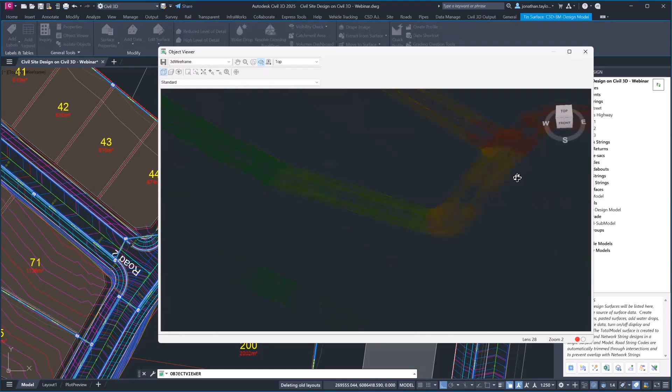And now I have a Civil 3D surface being created. And again, I'll just use our good friend Object Viewer, even though I don't need to see it in Object Viewer. I've just designed it in Civil Site Design. I could see this in Model Viewer, but there is our Civil 3D surface. That will be sitting in our Civil 3D Toolspace.

We've also got the option to export the model. So this is the line work of our design. So if we had car parks, basins, etc., this would all be included, but we can export the design to a DWG as 3D polylines, 2D polylines, etc. Great for things like machine control. Really, really helpful.

We also have the option through Model Viewer, and again, just for time, is the option to export the design as IFC 4.3. Okay, and we actually have the option for the subgrade model as well to export that as an IFC file. So it's just one of the many different ways that we can integrate, not just with Civil 3D, but obviously offer digital copies of your model in different formats.

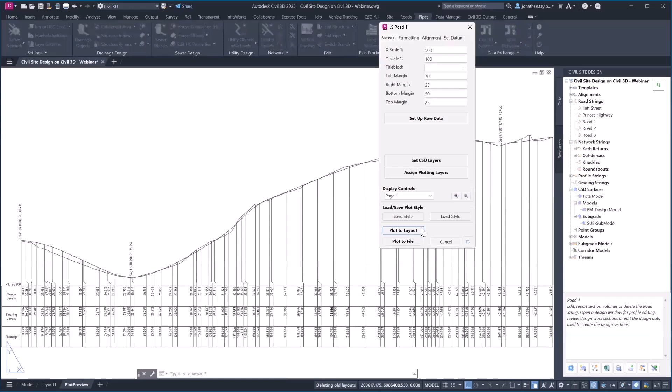One of the party pieces for us was always the ability to just get the delivery of this content out quickly. So for example, if I want road 1 as a long section, I just go plot long section. And here we're just going to go and pick a default style, one of ours out of the box. This is the kind of presentation I'm being given. Yes, you can use the Civil 3D profile views if you want to, but this is what I'm getting. So this is entirely editable to an extent where you can change things like layers, colors, sizes, etc. But out of the box, we're giving you something that requires really very little effort once it's been set up.

We've also got the option to plot cross sections. So we're going to go and grab road 1 here, have a look at the same thing. So again, this is out of the box cross-section plotting with Civil Site Design. Very, very fast, very easy to go and cherry pick the cross sections we want, add in extra pieces of information that we may or may not want.

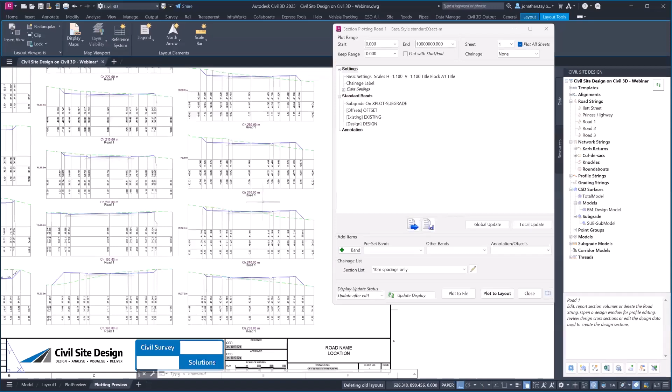Something that I will mention, we've got a volume report here, which will give us volumes of any part of our string design, but I'm just going to highlight something that's coming in version 25.1, which is the section volumes. And this is the next level in respect of sectional volume calculations for Civil Site Design. Just bear with me one second while it loads. For those of you hanging on in respect of time, I've got one more thing to show you, which will be the corridor after this, and then we'll be looking to end.

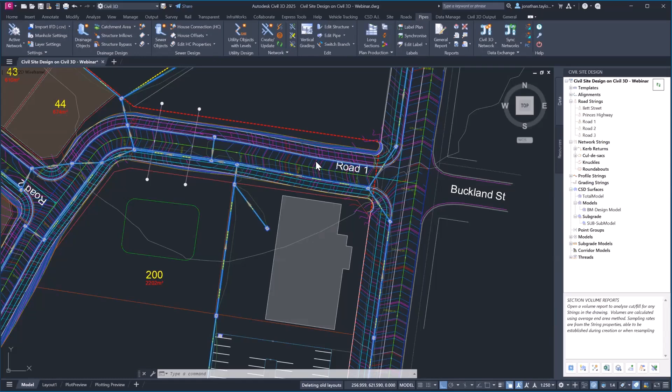This is the new sectional volumes form. So on road 1, for example, here, chainage 20. This is the type of reporting you'll now get for your design. Okay, I might just go to settings here and toggle off the polygons. This is showing me the cut and fill of my design live through subgrade polygons and validating the numbers for me. So this is something that you'll see in a forthcoming release, but certainly is the next level in respect of volume calculation design, including this little thing here, which is our viewer.

This is what we're calling the multi-section viewer. So if you want to see all of your cross sections of your design in one environment, this is where you can do it. You can actually get that reporting information live at your fingertips, all through one continuous window.

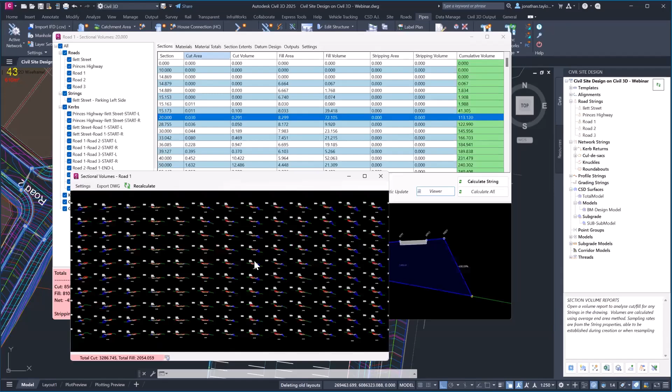So really, the last thing I want to show you is developing a corridor. And I wish I had a poll here to say who uses and creates corridors, because this was the painful part for me, developing the corridor. But I will show you, I'll do it through Toolspace here, that we can build a corridor model on your behalf. And the whole point of this is, you can keep designing with Civil Site Design, which is incredibly quick and nimble, and then produce the slightly more onerous part, which is the corridor, by using our Corridor Exchange tool.

All that we require you to do, and you can use one of the default settings as part of our software, is essentially a bit like the conversion file we looked at with the pipes. You say what parts of your template correspond to what links and points on your assemblies, and we'll actually build these for you.

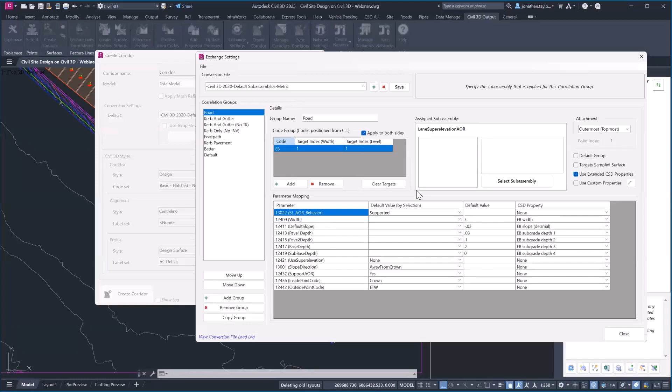I'm going to just show you this. This is one of those things where, I'll be honest, many people tend to think they probably don't need a corridor at this point, that they've got everything they need. But we're going to go create corridor.

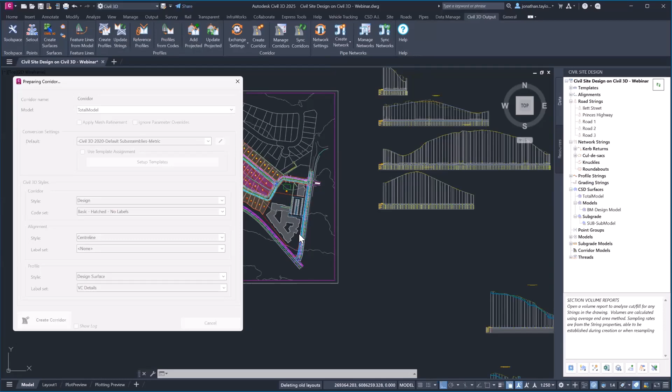It will now build a road corridor model of all of our roads, kerb returns, and cul-de-sac in the project for us. As you'll see shortly, there's a lot of work it's got to do. If you imagine doing this manually as a Civil 3D user, it's also going to be building the assemblies and sub-assemblies for us.

You can see it's working away on that corridor. I'd like to mention the speed at which we've been doing everything with Civil Site Design, and the work that would be involved with editing one part of the profile connected to this whole corridor, with regards to processing it.

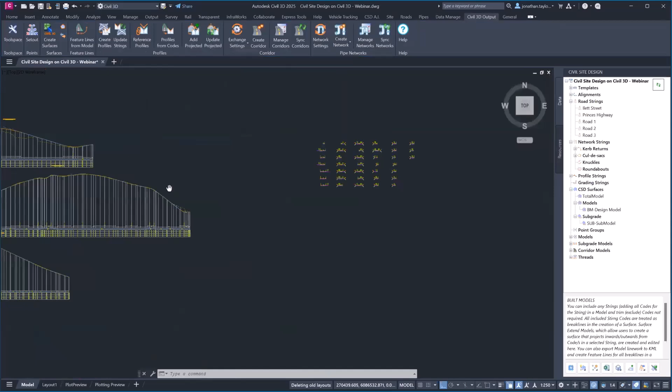Now we have a full multi-baseline editable corridor, which we can continually sync to. I can keep having that corridor synced and updated. It is at the moment sort of static, so I do need to run that sync, but essentially that's what the software is doing on our behalf, building this for us.

Having used the software in anger, and having been an ex-Civil 3D user, I never needed this again. But it's crucial that we do have it for those people that do want that corridor. Maybe you're wanting to pass this to Revit or to InfraWorks, then it's an incredibly important part of your workflow, the BIM workflow process.

That's all I had time to show you, and I appreciate there was a lot I've shown you in just over 50 minutes. There is a lot more to the software. Ultimately, my goal was to show you how we can streamline processes which are slow or cumbersome using just general Civil 3D on its own, but also show you how we can round trip and provide you back with relevant Civil 3D content you can either deal with within your project or pass on to other platforms.

On that, I'm now going to pass back over to my colleague, Ben. I think we're going to be just finishing off with our final slide.